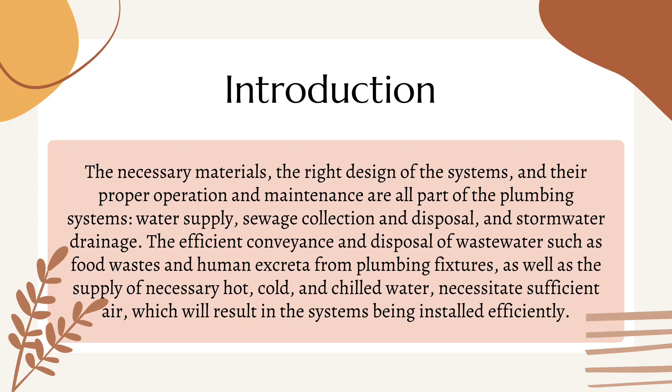For the introduction, the necessary materials, the right design of the systems, and their proper operation and maintenance are all part of the plumbing system, such as the water supply, sewage collection and disposal, and stormwater drainage, and efficient conveyance and disposal of wastewater such as food waste and human excreta from plumbing fixtures, as well as the supply of necessary hot water and so on. So that's what's included in plumbing systems.

Now let's proceed to the 22 principles of the plumbing code. For the first principle, a source of pure and healthy water must be given to all premises intended for human habitation, occupancy, or usage. So number one, we must be provided with pure and healthy water, especially in homes, because if we are provided with contaminated water, it must cause diseases such as amoeba. It's very common that drinking contaminated water or eating contaminated food can result in amoeba.

For principle number 2, the water supply to all plumbing fixtures, devices, and appliances must be sufficient in volume and pressure to allow them to work satisfactorily and without causing excessive noise under all normal operating conditions. Examples of plumbing fixtures are bathtubs, bidets, channel drains, drinking fountains, and showers. So here in principle number 2, it clearly states that our plumbing fixtures must be provided with adequate volume and pressure. Who would want to be late and then turn on the shower only to find weak water pressure?

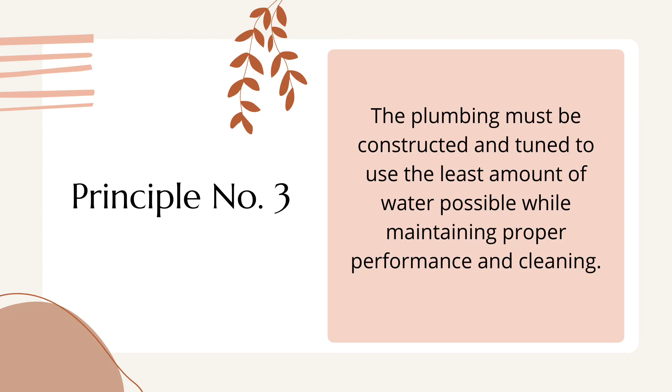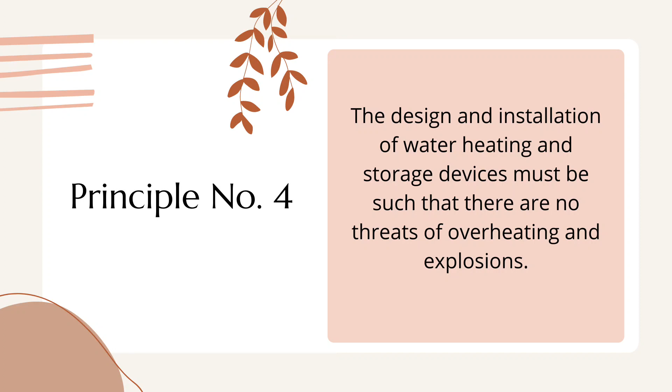Now let's proceed to principle number 3. The plumbing must be constructed and tuned to use the least amount of water possible while maintaining proper performance and cleaning. For principle number 4, the design and installation of water heating and storage devices must be such that there are no threats of overheating and explosions.

Now for principle number 5, whenever a building has plumbing fittings installed and is intended for human habitation, occupancy, or use on land abutting a public sewer, the sewer system must be connected to it. The sewer system, also called the wastewater collection system, is a network of pipes, pumping stations, and appurtenances that convey sewage from its points of origin to a point of treatment and disposal.

Now let's proceed to principle number 6. If you live in an area with a sewer or a private sewage disposal system, you must have at least one water closet and one kitchen type sink in your home. The minimum sanitation and personal hygiene needs must also be met by the installation of a lavatory as well as a bathtub or a shower.

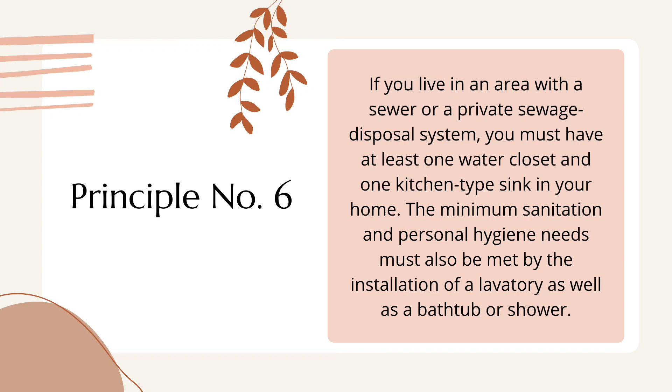Now for principle number 7, the material used for plumbing fixtures must be smooth and non-absorbent, and they must be located in ventilated enclosures and clear of hidden fouling surfaces. It is really important that plumbing fixtures are comprised of smooth and non-absorbent material to facilitate thorough cleaning, in order to prevent mold, bacteria, and infectious germs from taking a stronghold on the material.

Now let's proceed to principle number 8. The drainage system must be planned, constructed, and maintained in such a way that it prevents fouling, solids accumulation, and clogging, as well as having appropriate clean-outs that allow for easy cleaning of the pipes. The main objective of a drainage system is to collect and remove waste matter systematically to maintain healthy conditions in a building.

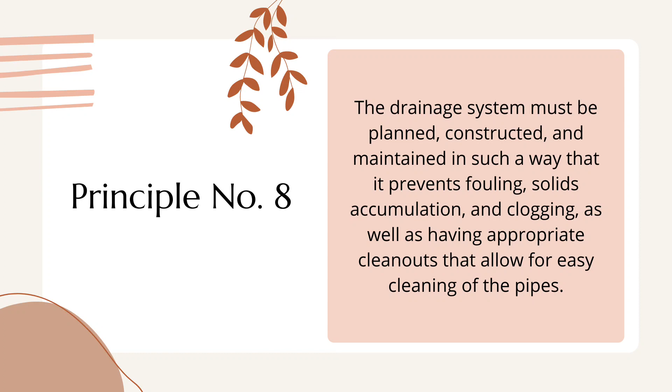So what will happen if our drainage system is defective and not well planned? If our drains are blocked, it can adversely impact our health, causing the growth of bacteria that leads to diseases and allergies. Also, the blockage in pipes can cause drained water and waste to flow back. Now let's proceed to principle number 9.

To ensure good service, all plumbing systems piping must be made of durable, NAMPAP-approved materials, free of defective workmanship, and planned and manufactured by registered master plumbers. So for our safety and to make sure our plumbing systems are durable, the materials used must be approved by the NAMPAP, or the National Master Plumbers Association of the Philippines, and the installers must also be registered plumbers.

Now let's proceed to principle number 10. Each fixture directly connected to the drainage system shall be equipped with a water-sealed trap.

For principle number 11, under normal use, the drainage piping system must be constructed to enable adequate air circulation without siphonage, aspiration, or forcing of trap seals. Siphonage is the process of emptying the liquid in a container through a tube to another container placed in a lower position.

Aspiration is the removal of fluids and/or gases from a cavity by means of an aspirator. Aspirators are also referred to as plumbing suctions.

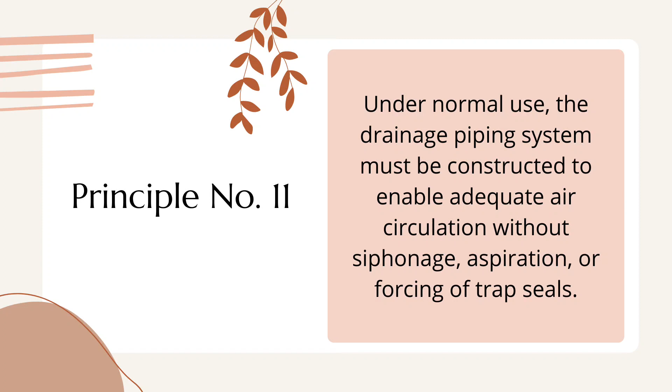Now let's proceed to principle number 12. To prevent blockage and the return of foul or polluted air to the building, vent terminals must extend to the outside air and be fitted.

Now let's proceed to principle number 13. To properly reveal all leaks and workmanship flaws, plumbing systems must be exposed to such inspections. So our plumbing systems must be examined to know if there are any leaks, so that the problem can be addressed immediately before it gets worse.

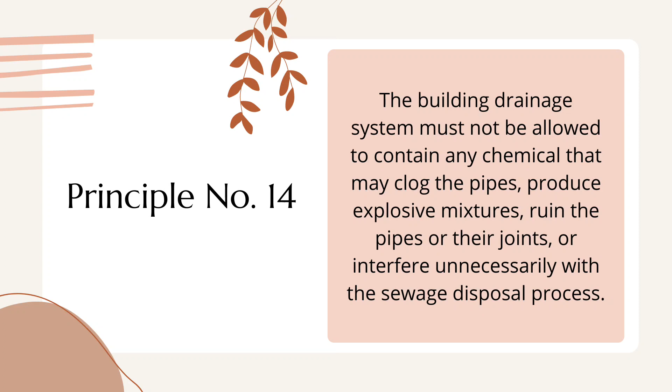For principle number 14, the building drainage system must not be allowed to contain any chemical that may clog the pipes, produce explosive mixtures, ruin the pipes or their joints, or interfere unnecessarily with the sewage disposal process.

For principle number 15, backflow of sewage must be properly protected to avoid contamination of food, water, sterile items, and other materials. The fixture, device, or appliance should be linked to a building's drainage system in an indirect manner as necessary.

Now for principle number 16, there should be no water closet in a room or compartment that isn't well lit and ventilated. So in every water closet compartment, bathroom, and general toilet room, there are requirements that should be met, which is the light and ventilation.

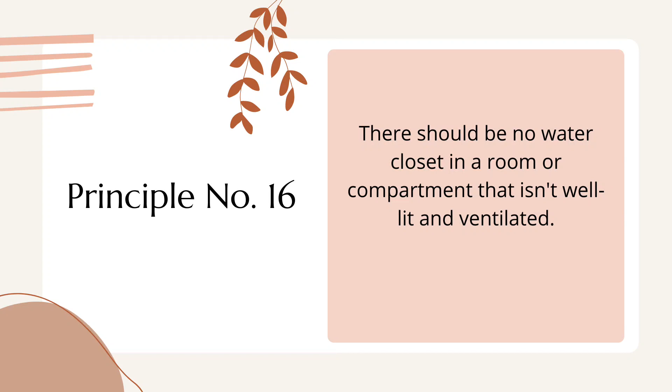Now let's proceed to principle number 17. If water closets or other plumbing fixtures are constructed in areas where there is no access to a sewer within a reasonable distance, the building sewage must be treated and disposed of in a safe manner, such as a septic tank. Not everything is connected to a sewer, especially when building a CR (comfort room) — you can't just directly build one there. First, you need to build a septic tank so that the waste can be properly disposed of.

So for principle number 18, when sewage backflows into a plumbing drainage system, appropriate measures must be taken to prevent the building from overflowing.

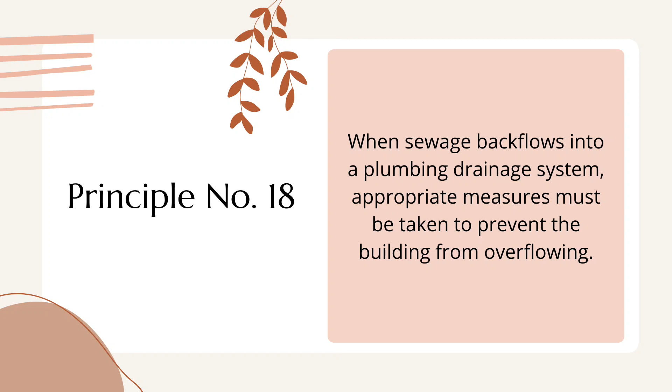Now let's proceed to principle number 19. By keeping plumbing systems in good working order, it should be managed or maintained by registered master plumbers.

For principle number 20, all plumbing fittings must be correctly spaced so that they can be used in the manner in which they were intended.

Now for principle number 21, registered master plumbers must install plumbing in a way that preserves the structural strength while also avoiding damage to walls and other surfaces as a result of fixture usage.

And for the last one, principle number 22, the discharge of sewage or other waste from a plumbing system into the ground or into any waterway that could harm surface or subsurface waters must first be made harmless by undergoing some sort of acceptable treatment.

So that would be all for the first part of the National Plumbing Code, which is the principles, or the 22 basic principles of the plumbing code. I hope you learned something, and thank you for listening.